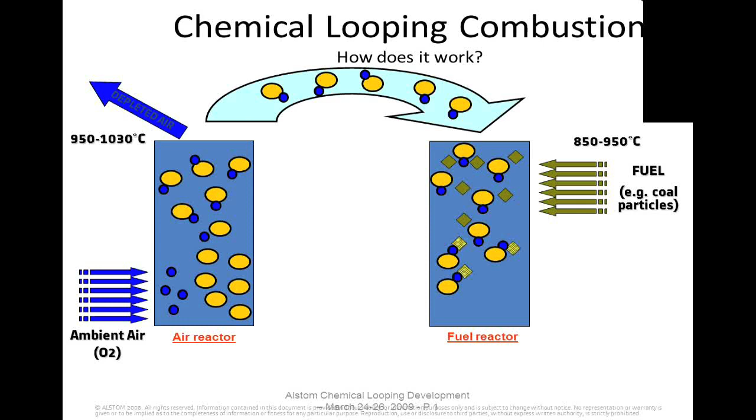Since we make CO2 separately, we now have CO2 essentially ready for sequestration. There's a minimal amount of preparation - we have to get the water out, and it has to be compressed, but otherwise it's ready for sequestration.

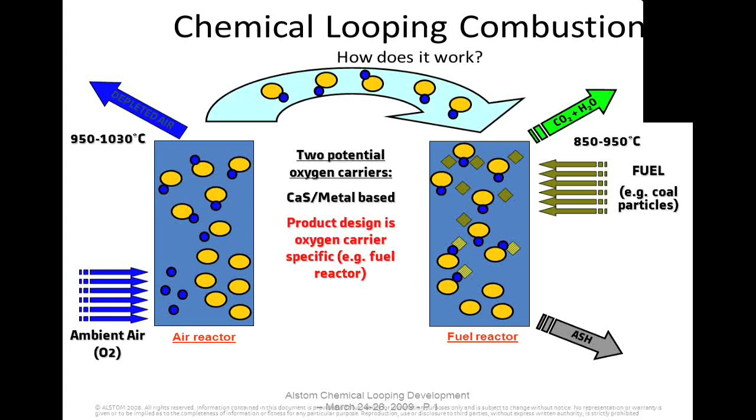Ash is discharged, and then the solid material that's carrying the oxygen brings the carrier back to the air reactor, and we replace the oxygen that was used. So the little blue dots are the oxygen, the orange dots are the carrier, and the material goes around basically in a loop.

In Europe, the primary oxygen carrier is metal oxide based. In the United States, Alstom Power is working on a calcium sulfide based carrier. I should point out that calcium sulfate would be the oxidized product, and calcium sulfide would be the reduced product. Calcium sulfate is nearly 50% oxygen, so it's a somewhat better oxygen carrier than air.

This whole process can work without the benefit of an air separation unit, and it also has the benefit of operating at a temperature typically higher than the steam temperature, so any inefficiencies in the looping process would be rejected to the steam process. The goal of this operation is to carry out these reactions with a minimal energy penalty. In fact, we should be able to get down pretty close to just the penalty for compressing the CO2.

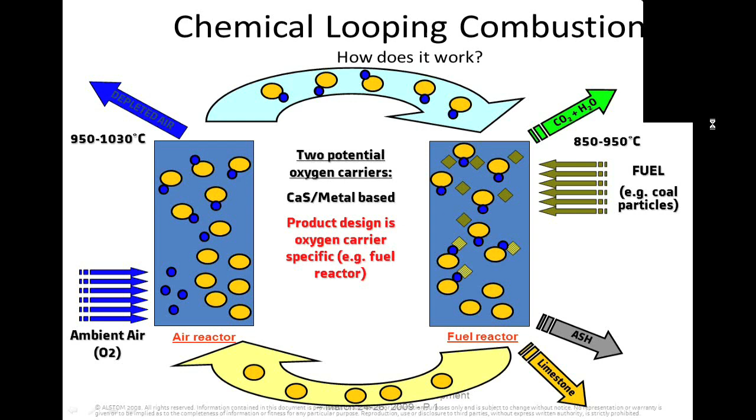Where are we in the demonstration or development process? There's been testing done at a very small scale, a 2-inch reactor for chemical looping. But the traditional equipment, fuel and limestone preparation, circulating fluid bed steam generators, conventional gas cleanup, and power block are all relatively existing technologies. Our goal would be to basically substitute the traditional PC or circulating fluid bed steam generator and gas cleanup with the chemical looping, and then have a CO2 recovery option.

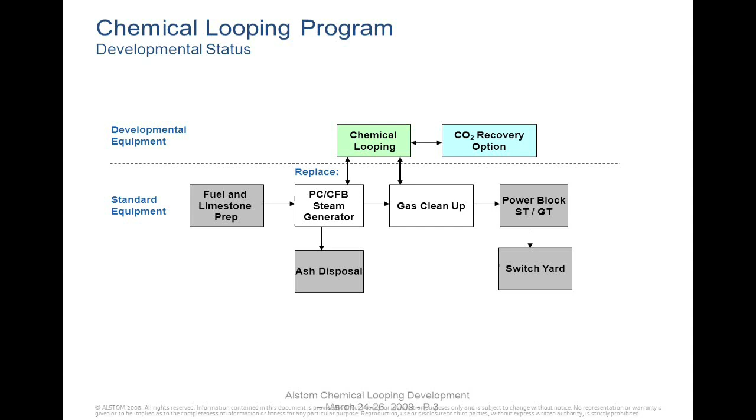There's quite a bit of flexibility with the chemical looping process. Initially, we're looking at chemical looping combustion. In this case, we use an excess of the calcium sulfate that's going to the reducing reactor where we react it with the fuel, and the product gas is CO2. Hot solids are circulated to control the temperatures. But we have options for gasification and hydrogen production as well, depending on how much calcium sulfate is circulated between the air reactor and the fuel reactor.

In the case of making hydrogen, we can also use limestone in a calciner and make that a third loop of calcium carbonate and calcium oxide for CO2 and hydrogen production.

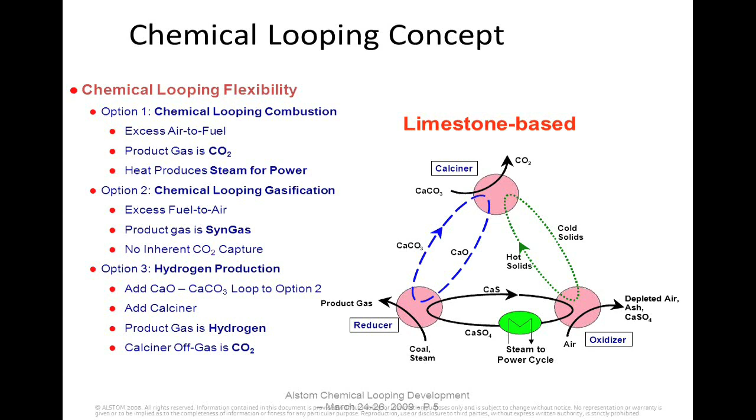Again, you can see in option 1, calcium sulfate goes to the reducing reactor or the fuel reactor. Coal and limestone are fed to that reactor, and CO2 is produced. The hot solids of calcium sulfide are circulated back to the oxidizing reactor, where we bring in air, generate the steam, and essentially nitrogen is the gaseous product.

In the case of making synthesis gas, we would reduce the amount of calcium sulfate going to the reducing reactor and add some steam, and that would give us synthesis gas. And in the case of hydrogen, we would add a calciner, making the CO2 off the calciner, and use the calcium sulfate and steam to produce hydrogen from the reducing reactor.

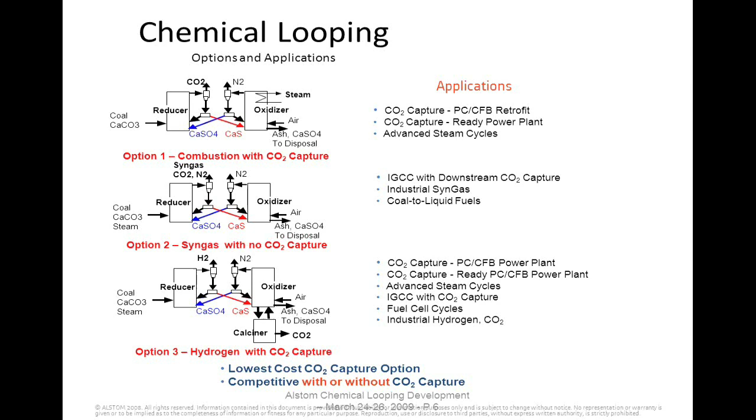This reference is from a DOE study that was done initially starting in 2003, and the figures have been corrected, in this case up to 2006.

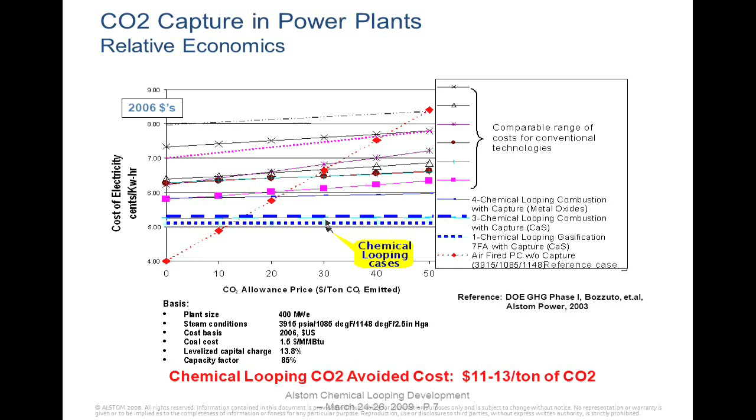In particular, one of the reasons for cost savings is that the volume of the reactors and the weight of materials is significantly less. Comparing the building volume, it's roughly half the volume, and in looking at the weight of materials, approximately two-thirds of the weight. This allows for material savings in addition to the energy savings achieved with the chemical looping process.

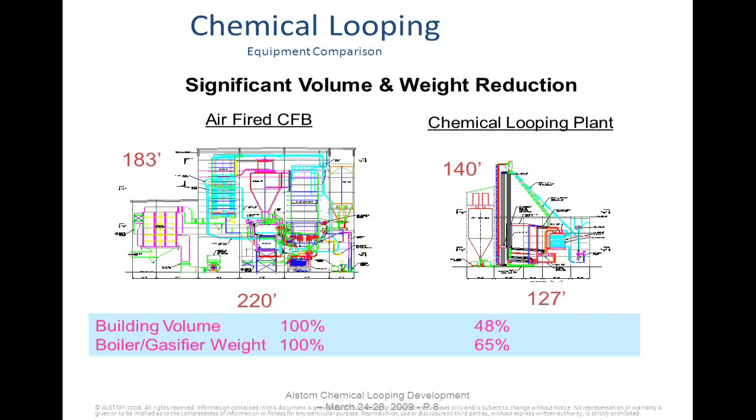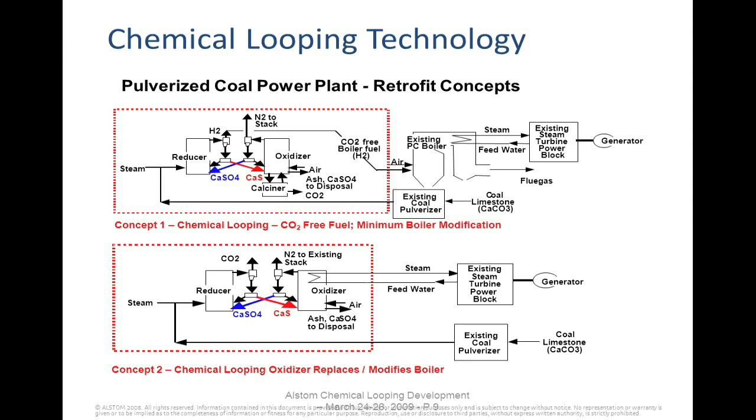In the U.S., Alstom has done a considerable amount of testing on a 65 kilowatt thermal system, about 2 inches in diameter. The equipment was built and paid for by Alstom, and some of the test work was supported by the United States Department of Energy.

Basically, this was a full looping system, but due to the small size, the reactors were electrically heated. So the so-called autothermal operation of the plant was not demonstrated, but the chemical reactions and the ability to loop the solids between the two reactors was successfully completed.

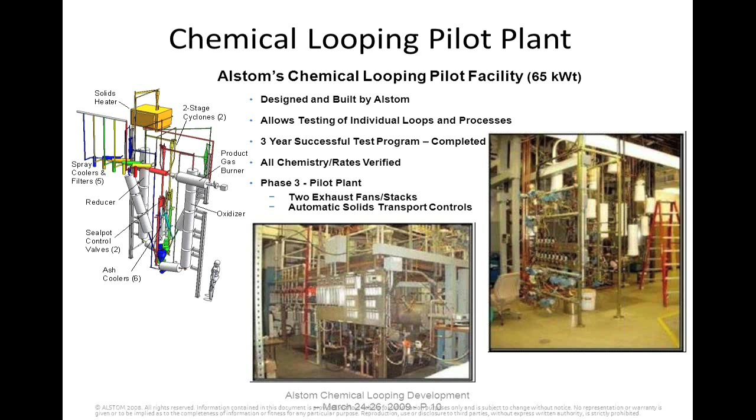In support of that test facility, both a 15-foot and a 40-foot cold flow model system were set up. The real development activity for chemical looping is in controlling and moving the solids around between all these reactors and being able to successfully start them up and control the solids appropriately throughout the entire load range. So flow modeling of the solids and the solids handling systems is fairly important to a successful operation of the system.

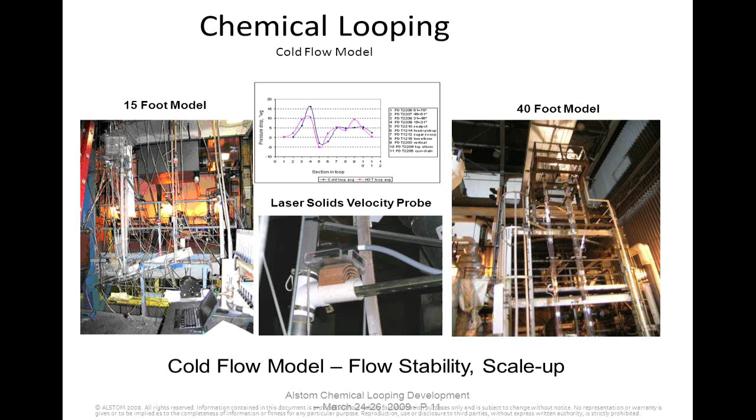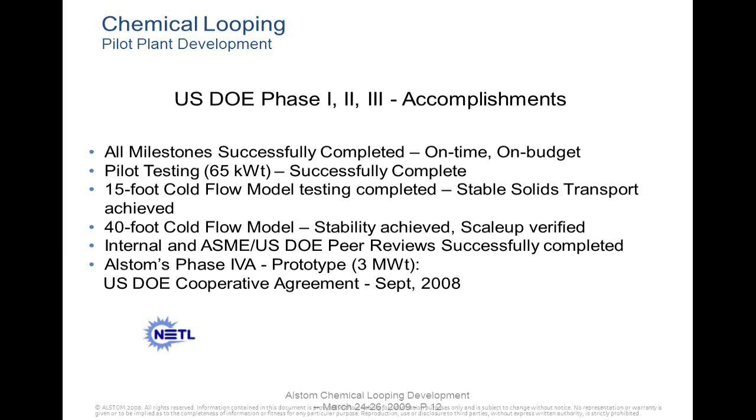The U.S. DOE test program came in three phases, including the cold flow model testing. And as a result of the successful operation, Alstom constructed a 3 megawatt thermal plant, and that plant is currently being tested in the Alstom test facilities in Windsor, Connecticut, in the United States.

In Europe, a 1 megawatt thermal test facility is about to be tested, and that technology is focused on metal oxides. The approach there is to use conventional circulating fluid bed boiler reactors and use a metal oxide, maybe something like ilmenite, which is an iron and titanium oxide, as the oxygen carrier, and circulate the solids appropriately.

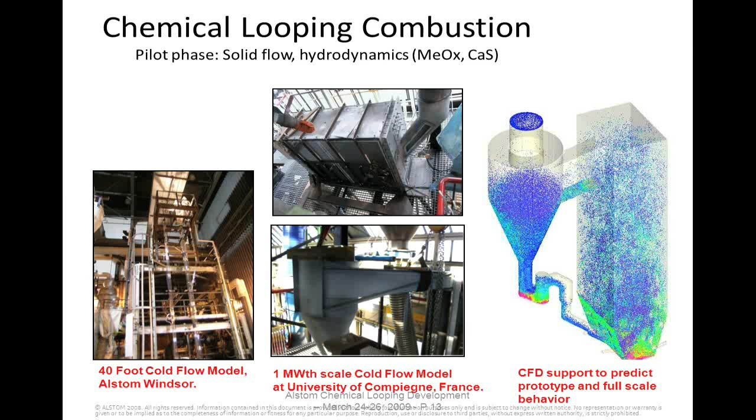The current reactor in Windsor, Connecticut operates at about 1,000 pounds, or a half a ton an hour, of coal. It's designed to be able to operate in any of the 3 modes: combustion, synthesis gas, or hydrogen.

The unit has been built. A number of tests have been run. We've had 2 series of modifications to improve the control of solids and the feed of the material to the reactors. The most recent testing has been aimed at verifying the chemical rates in the reducer, which was done successfully.

Additional testing will be needed to demonstrate the autothermal operation, which means the temperatures in both reactors reach steady state on their own, and that we can generate a relatively pure CO2 with very little CO, most of the carbon staying in the reducing reactor, and then in the oxidizing reactor minimize any release of SO2 from the carrier.

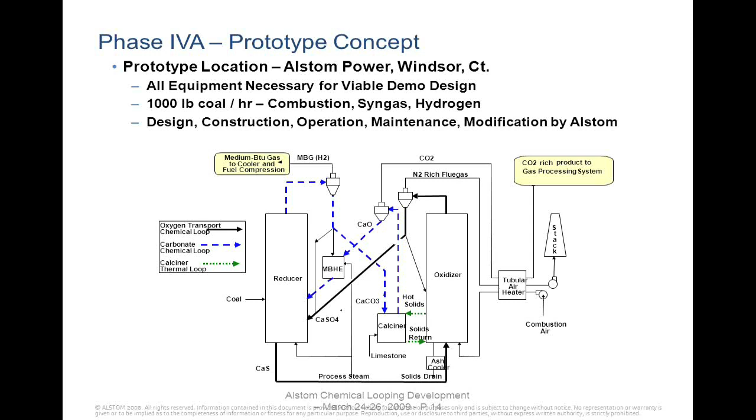Should those again be successful, that would minimize any treatment of CO2 that would be required, and the depleted airstream would require essentially no air pollution control system other than particulate. Again, another means of reducing the overall cost of the plant.

Again, it's important to take this development in steps. Handling of the solids and controlling the reactions is still in the learning stages. We've had a couple of hiccups, if you will, in handling the solids at the plant, and so we've already been through a couple of stages of modifications.

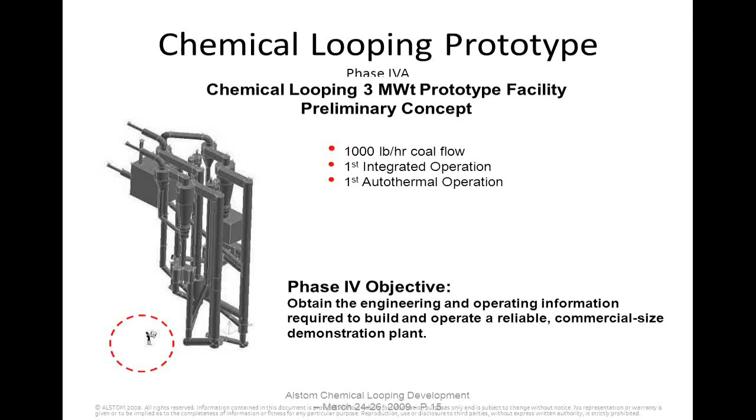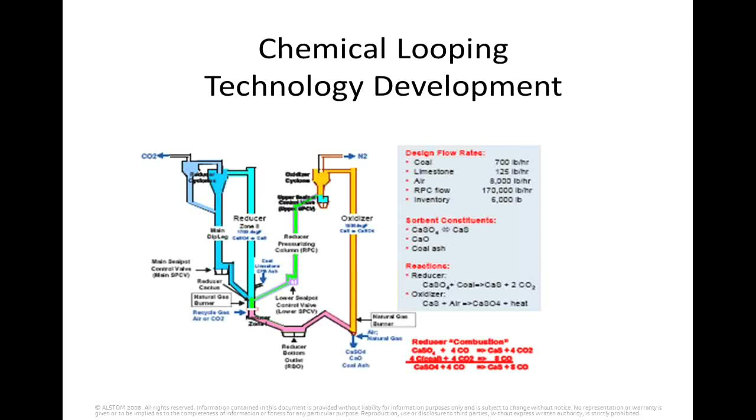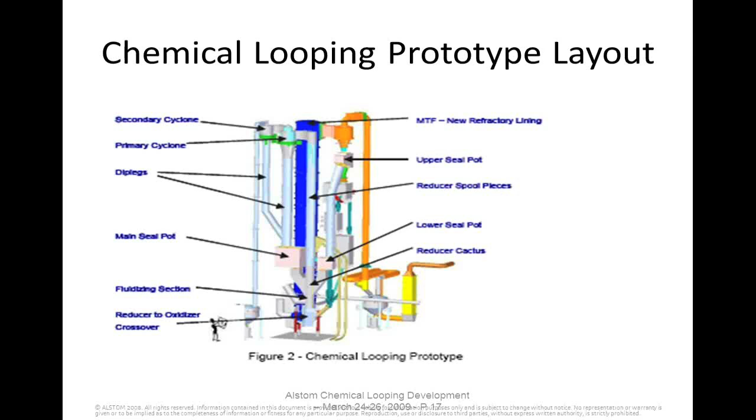A little larger look at the prototype, the 3 megawatt system, and you can see the location of the primary and secondary cyclones, the various dip legs to get the solids back into the reactor, the seal pots, the fluidizing section underneath, and the crossover lines to bring the solids from one reactor to the other. In this particular case, an existing fluid bed reactor was used and modified to make the entire system, again, to save a little bit of capital cost.

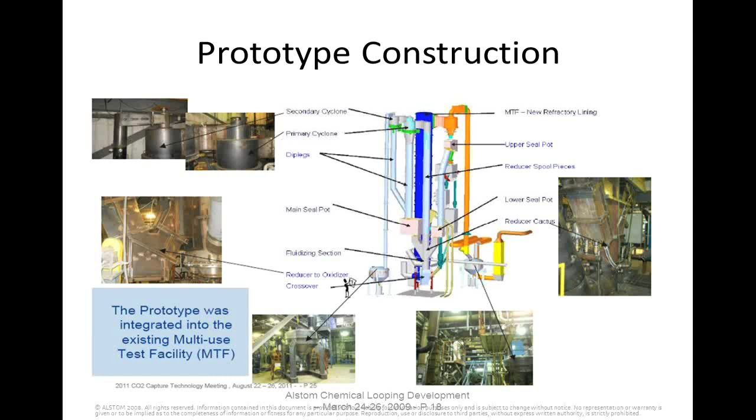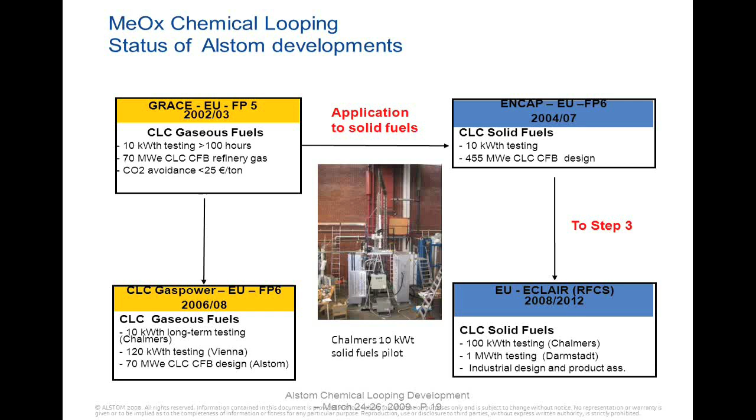In the European system, there have been a number of programs starting with 10 kilowatts thermal testing and leading up to the 1 megawatt system that's been built at the university in Darmstadt in Germany. This program has the nickname Eclair, and it's not the dessert. In French, Eclair means to clarify, and it stands for emission-free chemical looping coal combustion process. There are a number of participants, including Air Liquide, Vattenfall, SINTEF, and CSIC.

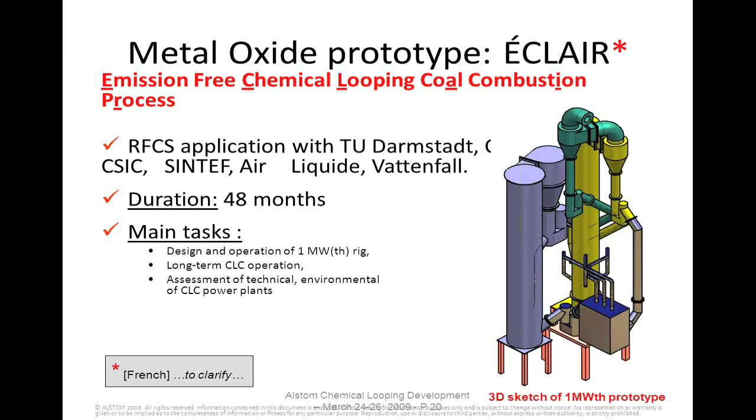That plant construction is relatively complete, and they're in the startup process. They plan to be testing for a period of about 4 years.

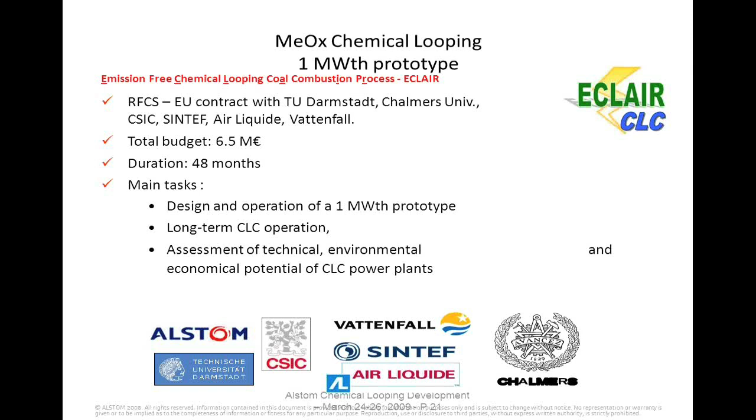In this case, metal oxide is the oxygen carrier, and so in the air reactor, the metal is oxidized to its fullest extent. The hot metal oxide would then travel to the fuel reactor or reducing reactor, where it would be reacted with fuel. The carbon will take the oxygen from the oxygen carrier, leaving a reduced metal oxide, and form the CO2. And the now reduced and relatively cool carrier would be returned back to the air plant to be reoxidized.

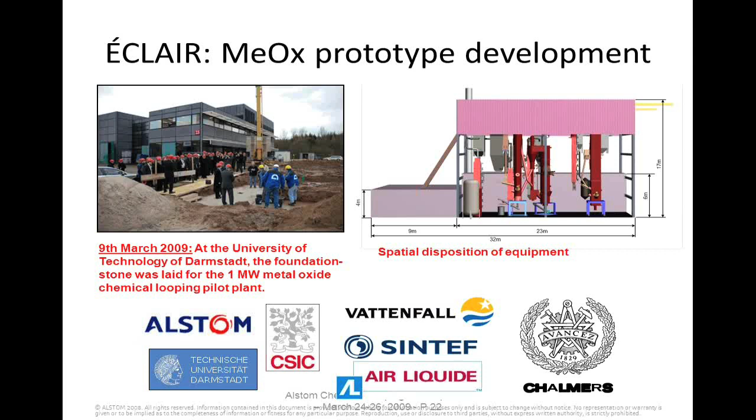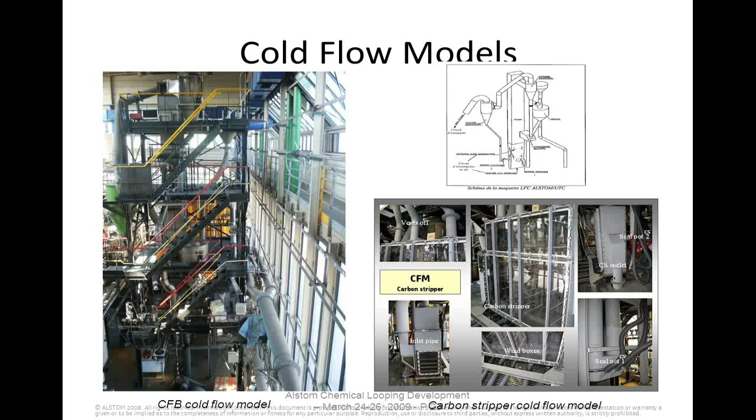Again, there is a supporting cold flow model of the chemical looping system at the University of Compiègne in France, and this cold flow model is a complete replica of the 1 megawatt thermal loop. That just gives you a general arrangement of the 1 megawatt pilot plant. You can see there's a multi-level construction.

So we're getting close to the end of time. Chemical looping combustion is a potential breakthrough technology, operating the reactors at a temperature higher than the steam temperature. Essentially, any inefficiencies in the separation and capture of CO2 show up as heat rejected to the steam cycle, where at least some of that energy can be recovered.

The calculated figures show an energy penalty of less than 10% for a chemical looping plant. The program is global, with both metal oxide and limestone or calcium-based carriers, and prototypes at the 1 to 3 megawatt level have been built and are being tested in the U.S. and in Europe. There is also a fair amount of interest in a number of countries.

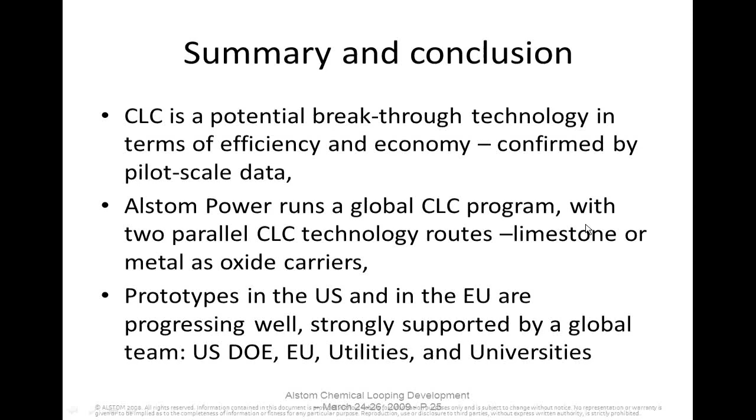Let's see if I can get that one. Thank you very much, Carl, for what was a very, very interesting presentation, and certainly we've had a number of questions that have come through in regard to chemical looping combustion, and oxygen or CO2 removal. Carl, we have a question from Diana Kennedy from the University of Newcastle: how are high temperatures of combustion created in the unit and then maintained?

Okay, the air reactor is where the heat liberation occurs. When oxygen reacts with the oxygen carrier, it generates heat. The amount of solids recirculation in the entire system essentially determines the level of temperature that can be achieved.

So we're shooting for 1,000 degrees centigrade in the air reactor, and we recirculate a substantial amount of solids over to the fuel reactor. That, of necessity, consumes some heat, so the temperature drops about 100 degrees centigrade, and then the solids are brought back. In that simplified flow diagram, we were recirculating about 170,000 pounds of solids, where we're only reacting 1,000 pounds of coal and 8,000 pounds of air. So it's the recirculation of solids that controls the actual temperatures that are achieved.